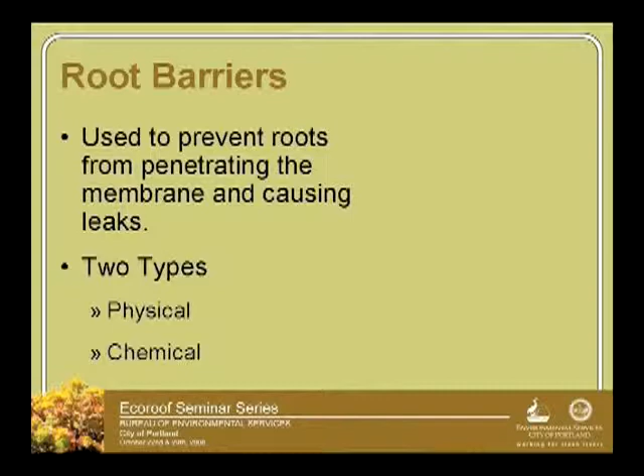We talked about many of the single-ply systems don't require root barrier. Modified or asphalt systems do require root barriers. And the physical root barriers I showed you up here is the blue or black, right, or clear.

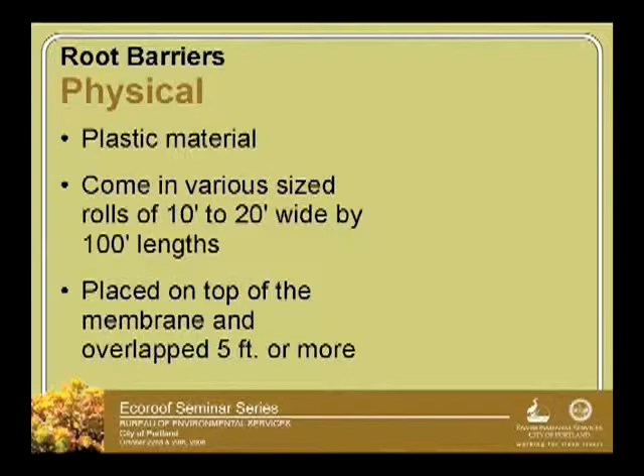10 to 20 foot wide widths, 100-foot lengths, a big roll, and you just kind of place it on top and overlap those seams by 5 feet, assuming that sedum isn't going to have a 5-foot root that's going to go over and try and penetrate that membrane, or trees or whatever, you might actually get seedlings growing up there.

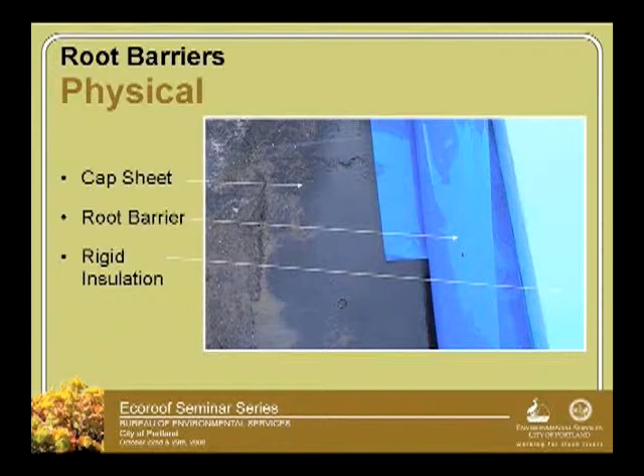And the example here, you guys have seen this now quite a few times, cap sheet. So that's our asphalt cap sheet that I showed you here. Root barrier, then there's our insulation. So that's fairly cut and dry, I guess, on the physical root barriers. The chemical root barriers are another thing.

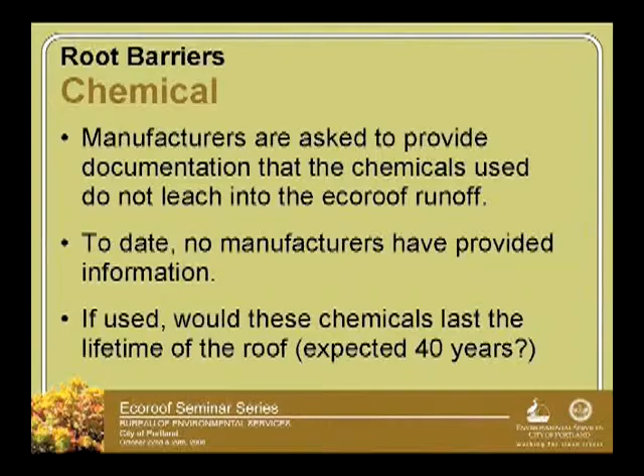And what we just basically say is that they're not really allowed in Portland because we don't know. We're asking manufacturers to prove that their chemicals do not leach out over time. And remember, when we're talking about over time, we're talking about the lifetime of this eco-roof, so 40 to 60 years.

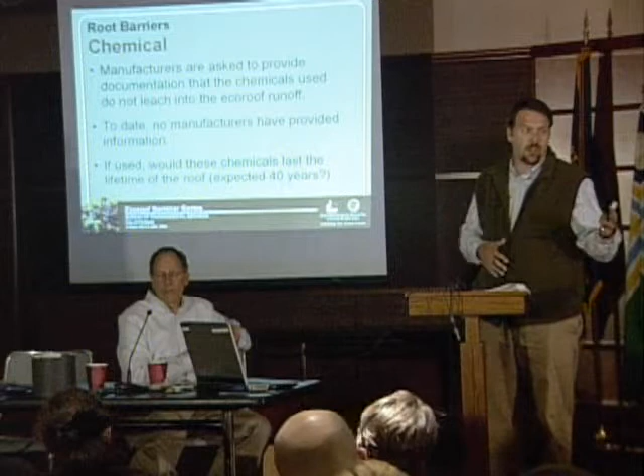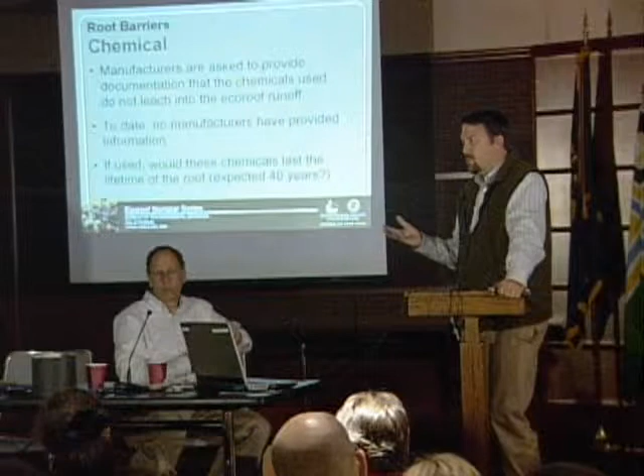And if they can show us that this chemical that they've impregnated in this root barrier to inhibit root growth is not going to leach out and contaminate our waterways, because, of course, we're vetting all the other products of an eco-roof and being sure that those are environmentally sound. And to date, we haven't had any manufacturers provide that information, and so we haven't seen chemical root barriers installed in too many of our eco-roofs.

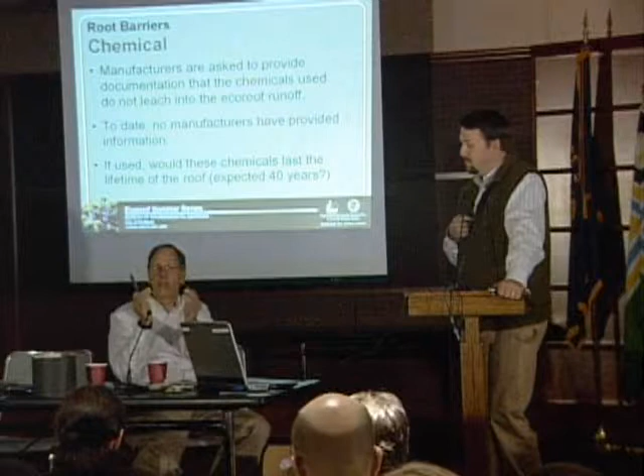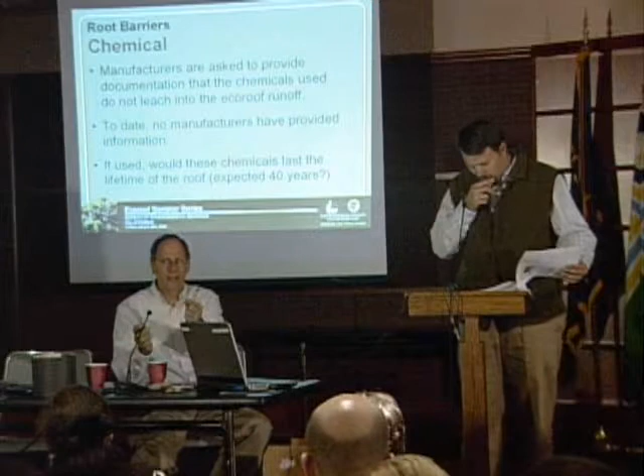And this relates to that question that you asked earlier. So this is one place where we said, okay, because of us promoting eco-roofs, this concept has come into our environment of putting chemicals up on the roof to solve this root problem. So, as Dave just pointed out, we just said, okay, we can't tell somebody you can't do something, but we can ask them to show us that their product is not going to cause a problem.

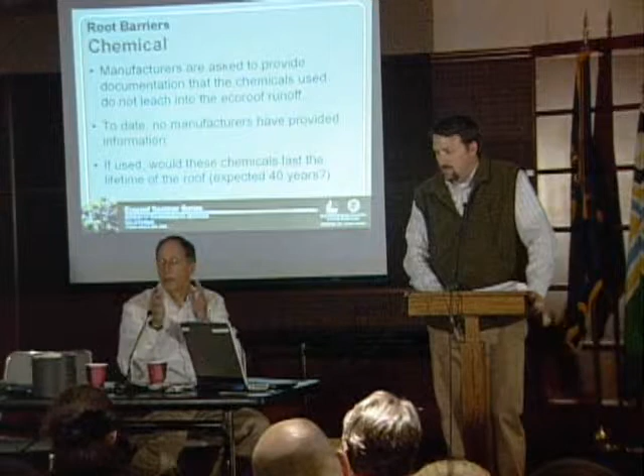Now, maybe someday we'll use that same rationale to look at other products and how we might deal with that. But at least for the time being, because there are companies that are putting copper into this stuff, and they're putting pesticides into their products.

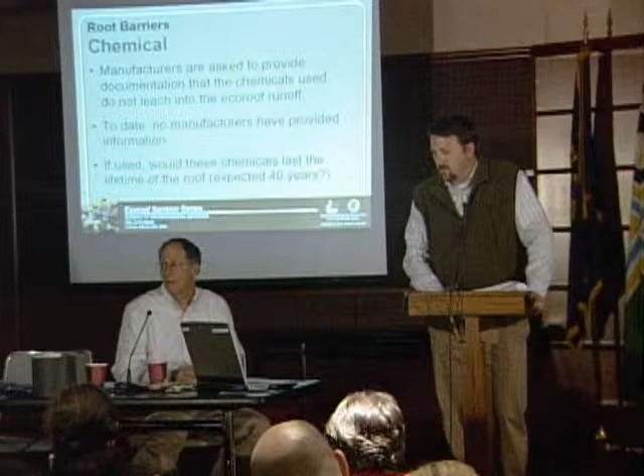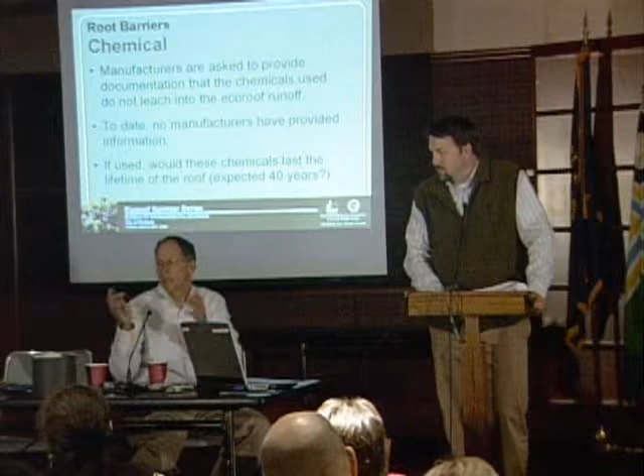And we did have documentation from a project in Switzerland where there was a company that was putting pesticides in back in the 1980s, as this was getting started in Switzerland. And they actually did tests, and they found that pesticide was leaching out and going into the receiving water. And so then they banned it in their country.

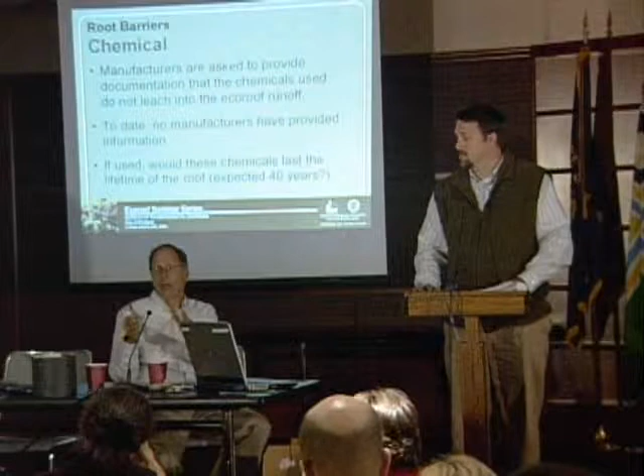So on his trees, on the inside of his black plastic container, he uses zinc. And that prevents... Well, there's zinc, copper, various other things, and so it doesn't matter what they use. We just say if it's a chemical, you have to give us documentation that it's not going to leach out into the drainage system, whatever it might be. A lot of them use copper. Yeah, copper's common.